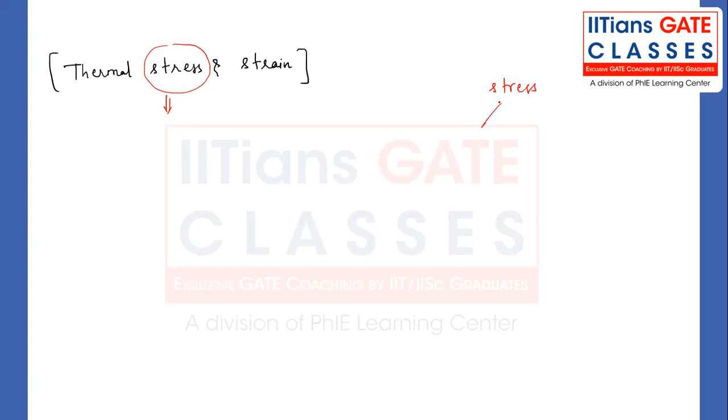So here I will classify the stress under two categories: one is mechanical stress, and then we have the thermal stress.

Now try understanding what I'm talking about. In thermal stress, whenever you say total stress developed on the cross section of the member, you always represent it by both these stresses. Put a very important note here: what I am discussing right now will be discussed theoretically as well as with formulas. So, total stress on a cross section of the member...

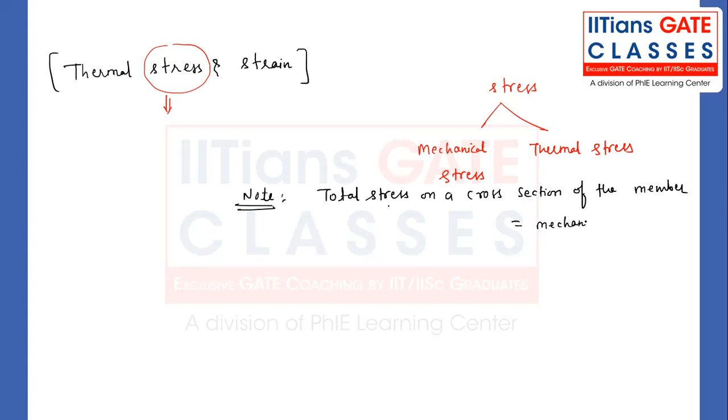will be equal to mechanical normal stress plus thermal stress. So total stress on a cross section of the member will be mechanical normal stress plus thermal stress.

But what about the mechanical normal stress? Mechanical normal stress is developed due to the load acting on the cross section of a component. This mechanical component of stress will be generated due to the load acting on a cross section of a component.

When you apply the load, the body will try to resist that load. During that resistance only the stress will be generated, that is nothing but mechanical stress. Sir, what about the thermal stress? That is what we have to discuss.

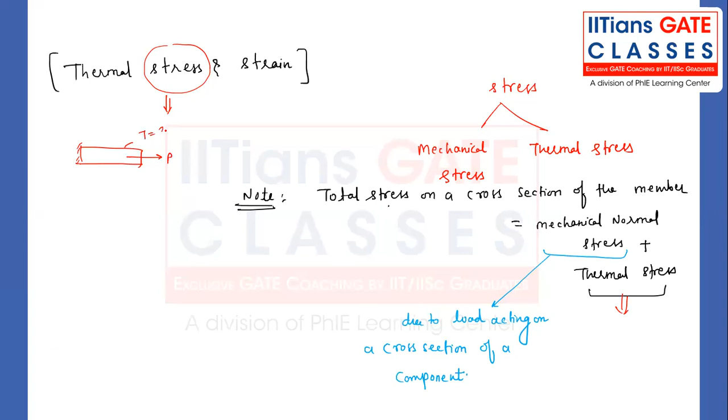See, suppose you have taken any body and you are working, applying the load at a temperature, let's say 25 degrees centigrade, that is the surrounding temperature. Like in a particular laboratory of this firm, you are maintaining the temperature as 25 degrees centigrade. That means there will not be any thermal stress if you are not changing the temperature.

So for generating the thermal stress, for developing thermal stress in a component, in a material, the first criteria should be that there should be some temperature variation. There shall be temperature variations, that is the most fundamental requirement of thermal stress to be generated.

Because not only the temperature variations, delta T, I'm talking about delta T, you will see in the formula also delta T is coming. So there's no doubt that in the theoretical aspect we are saying that, but formula-wise, can we prove that? Yes, we can prove that.

The second requirement will be the above thermal deformation, which should be restricted either partially or completely. Let me write here: this is the second requirement of generating the thermal stress, that is the above thermal deformations.

Because of the temperature variations, there will be some thermal deformations. So the above thermal deformations, because of temperature variations, shall be restricted either partially or completely. Whenever you talk of any member, any material you take, there will be two types of stress: mechanical normal stress and thermal stress.

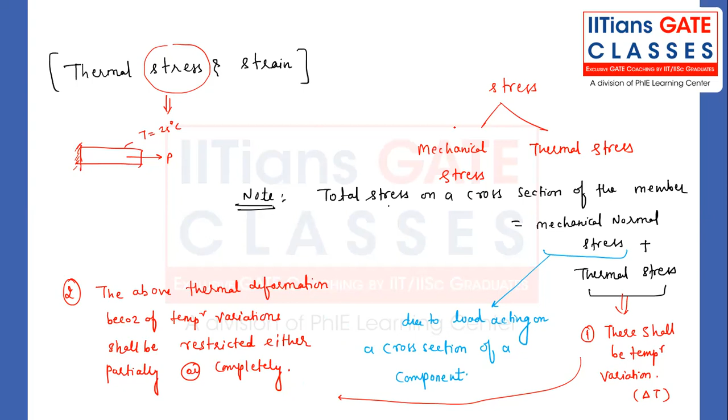Understand, suppose my dear friend, it's a property of the material. What is the property of the material? For example, there is a rod which is placed in environmental conditions, not in the air, but on a bench or something. And now for this rod, I have increased my temperature, delta T I have increased. For example, temperature can decrease also, in a cool environment it can decrease.

So this particular material, my dear friend, when I increase the temperature, what will happen? There will be some kind of deformation for this material. So what is this? There will be thermal deformations.

As we are not applying any load, there will not be any axial deformation as of now, only we are increasing the temperature. That's why because of increment of the temperature, there will be some elongation in the length side as well as in the other dimensions. The final length will be more than the original, and whatever the width will be there, that is also more than the original width or thickness of the material.

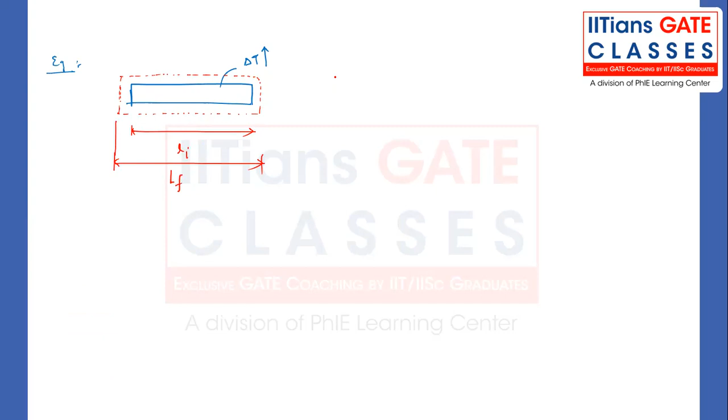So what is this delta, the change in length? The total final length is maybe Li plus delta L. Whatever the change in length is there, this is the final length, for example this is my final length, this is the initial length. So whatever the final length minus initial length is there, I'm calling this delta L.

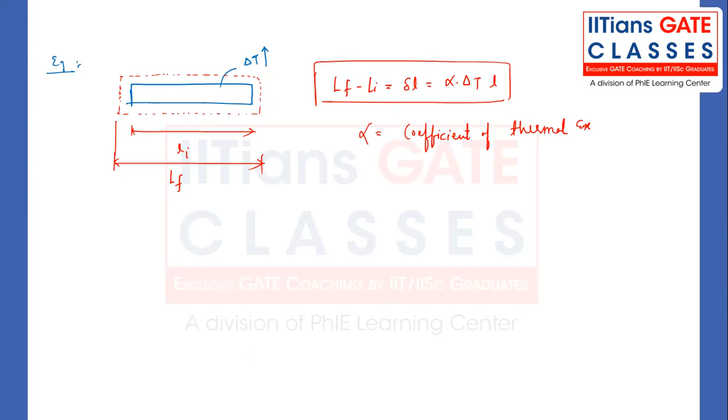What is this formula? The formula will be alpha into delta T into L. What is this alpha? Alpha is nothing but the coefficient of thermal expansion. This is the material property, one of the very, very important properties.

Second thing will be delta T, that is change in temperature. Li will be the original length, Lf will be the final length. So note down, these are the very important things regarding this.

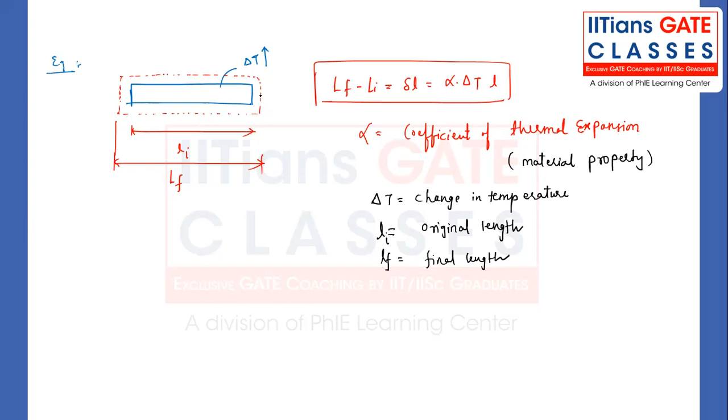Now, my dear friend, this thermal deformation which is happening is good, but will this thermal deformation cause any amount of stress? That's a big question mark. Whatever thermal deformation we observe, whether this will cause any amount of internal resistant force to be developed in the material, let's see. That is the point of discussion.

Unlike what you have seen with axial deformation because of loading conditions, where it's a sure guarantee unless there is a support - if there is a support, there will be some kind of stress, whenever there is a restriction, there will be some stress in the material. Let's see for this case. So this is what we are discussing, case by case, about these thermal stress studies.

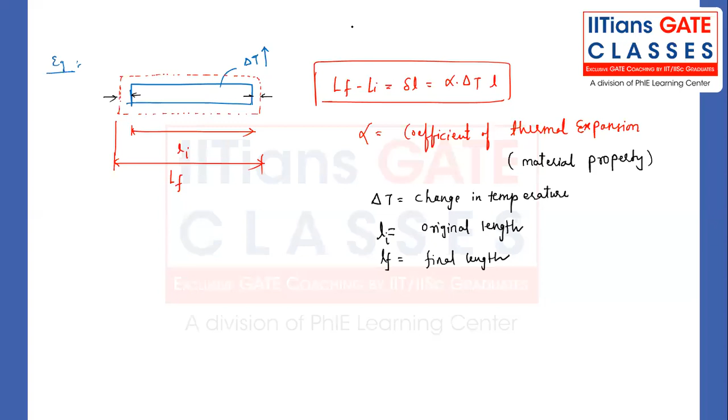Case number one, note down, this is very important. The case number one I am calling is the free expansion case. I will connect the dots. I know right now you might have so much confusion, but no need to worry. Note down the first case, that is the free expansion case, free expansion or free contraction, whatever you can call it.

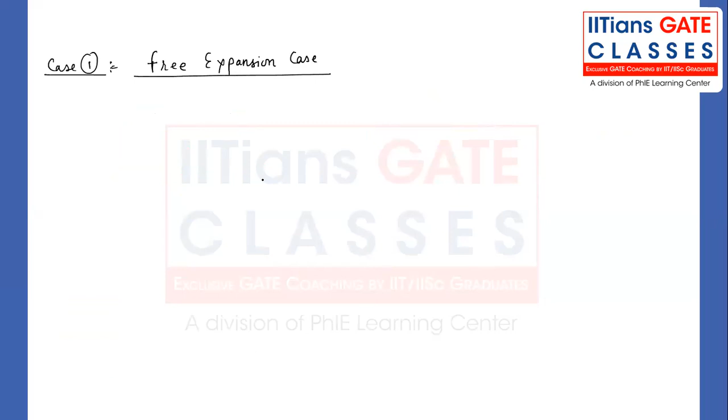Let's see, my dear friend, I'm just taking one slab, one body, which is nothing but a plate. A plate kind of thing where I can show all three dimensions: this is L, this is B, width, and this is nothing but thickness. My dear friend, this was the original at a temperature T.

But suddenly I increased the temperature like anything, delta T. Definitely there will be some elongations: delta L will be alpha into delta T into L. Delta B will be alpha into delta T into B. Delta T (thickness) will be alpha into delta T into T. There will be deformation in all three dimensions, lengthwise, widthwise, and thickness-wise. Now let me show it by the diagram so that you can visualize what I'm talking about.

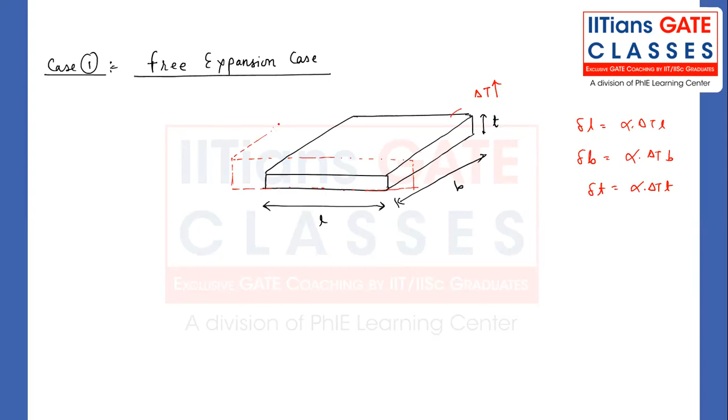Understand: when there is expansion, this material, based on its properties, will show deformation lengthwise, widthwise, and thickness-wise, as you can see clearly.

So this will be my final length, this will be my final width, and this will be my final thickness, my dear friend.

Because of the free expansion, there will be some strain. Whenever there is deformation, strain is change in dimension by original dimension. That is the fundamental concept. The fundamental definition cannot change whether you apply thermal load or mechanical load; the basic fundamentals of stress and strain remain the same. Change in dimension by original dimensions.

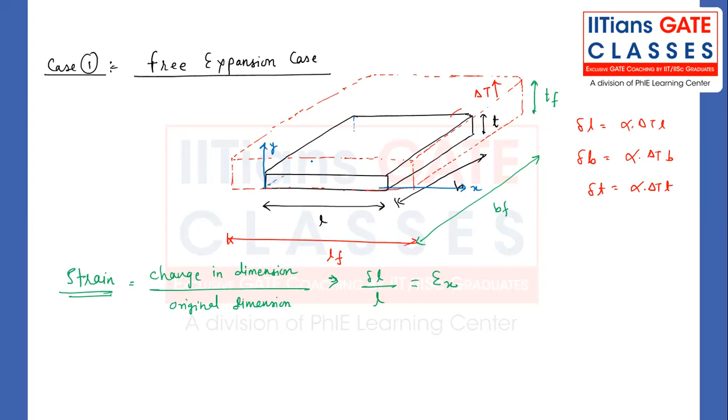What are the changes in dimensions happening? Change in dimension, suppose delta L divided by L. This I'm calling epsilon x. Let me put the coordinates so it's easy to identify: this is x, this is y, and this is z, my dear friend. Let me make it a three-figure kind of thing so you can visualize. This will be z. So along the x direction, whatever the dimension is, I'm denoting by delta L, that is the length. So this I'm calling epsilon x.

Sir, what is the formula? Change in length equals alpha into delta t into L, divided by L. This will cancel out, so we get alpha into delta t.

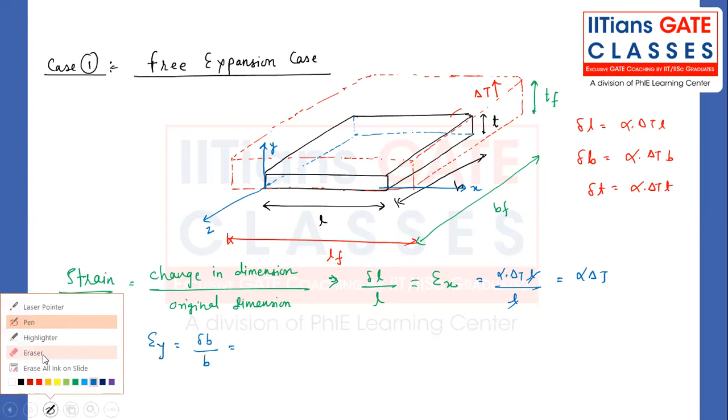What about the strain in the y direction? Change in width divided by original width—sorry, change in thickness divided by original thickness, because in the y direction we have the thickness. So change in thickness divided by original thickness gives alpha into delta t once again. Similarly, you'll get epsilon z also as alpha into delta t. So epsilon x equals epsilon y equals epsilon z, that is equal to alpha into delta t.

This is called thermal strain. No doubt, this is a thermal strain, not a mechanical strain, not a longitudinal strain. It is not a longitudinal strain, it is a thermal strain. Be very, very careful.

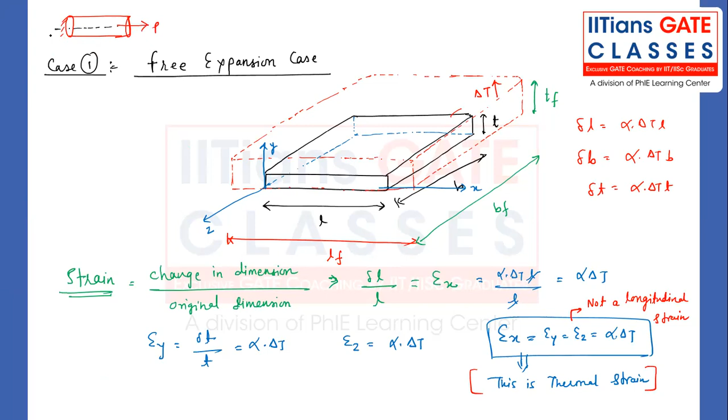What are longitudinal strains? We've already discussed this. Whenever we have a rod and we apply a load like this, then in the direction of the applied load, whatever strain is generated is called longitudinal strain. Perpendicular to the load, whatever changes happen in the dimensions, we call that lateral strain. In a thermal loading condition, there is no such scenario of longitudinal or lateral strain. Here we simply call it thermal strain. Keep this in mind.

Now, what is the nature of this strain? It is tensile strain, because in all directions there is an increment in the dimensions. So this is a tensile strain, not a compressive strain. There will be some tensile strain developed in the material. Make a note of it.

For case number one, alpha is a material property—everybody knows alpha is a material property. When you change the temperature, the material wants to expand. If the material itself wants to expand by its own nature, and we are allowing it to expand, that means there will be no stress.

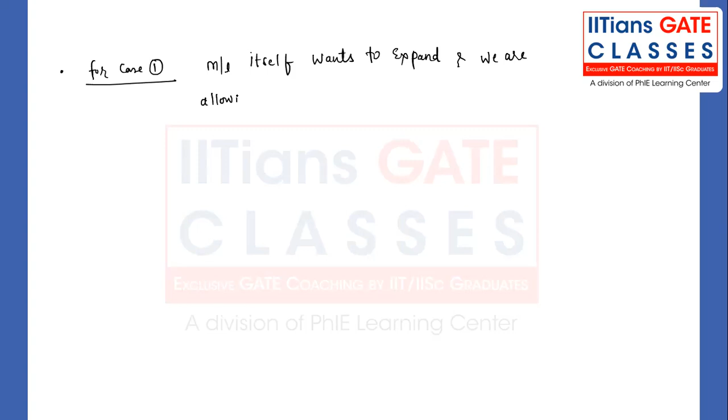I'm talking about the stress and strain we've discussed. For case number one, the material itself wants to expand, because when we increase the temperature, alpha being a property of the material, it will definitely try to expand. Nobody can stop the material from expanding—it's a property. The material itself wants to expand, and we are just allowing it to expand.

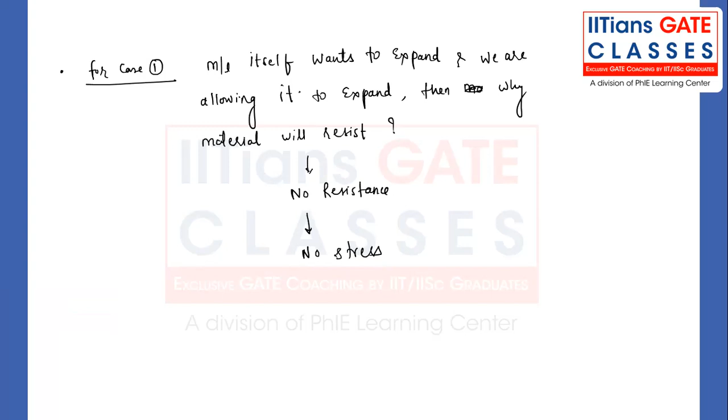Why will material resist? No resistance means there will be no strain or no stress. No resistance means no stress. So free expansion is nothing but a no stress condition, my dear friend. That means sigma thermal stress in X direction, sigma thermal in Y direction, sigma thermal in Z direction will be 0, my dear friend. Sir, what is the meaning of you are allowing it to expand?

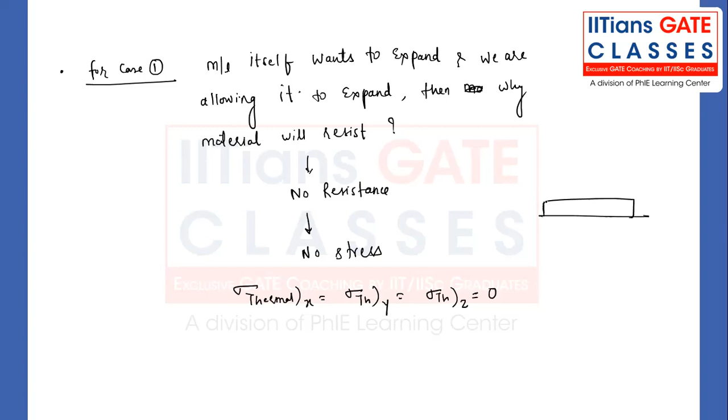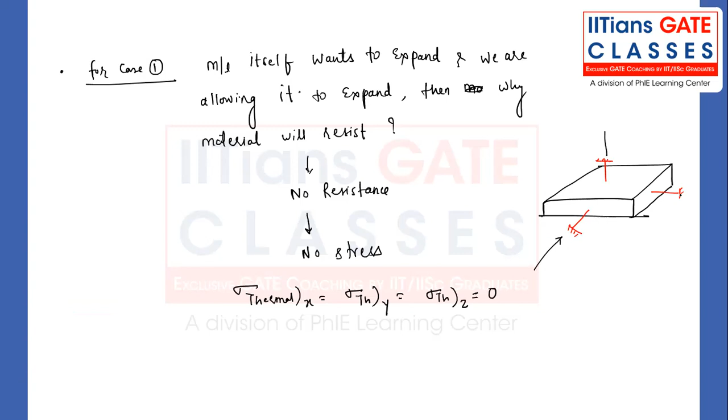See, just now I told you we have just restricted the material. For example, suppose we are not allowing it freely to expand, not allowing it to expand easily. We are just superimposing some kind of support reactions. Now there's a support, and this support will say, now you cannot expand freely, because there will be some kind of reaction forces. Rx, Ry, and Rz will be coming into the picture.

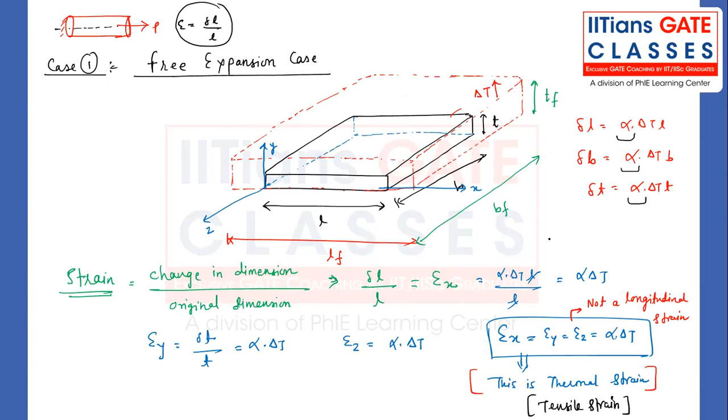Earlier, case number one, there is no such kind of support reaction. Whatever support reaction is there, from nowhere is it coming, because we are going to allow it to completely freely expand. But here you can see there is no such kind of restrictions. Material is freely expanding like anything. But in this particular scenario, the material is placed, the temperature has been increased, but it is not allowed freely to expand because some restriction is there.

Because of what? Why are the restrictions coming? Because of the support reaction forces. So indirectly I can say Rx, Ry, and Rz were 0 in our first case. There was no reaction forces. Material was freely trying to expand. Material wants to expand and we are allowing it to expand.

What is Newton's first law? If the body is in a particular state of rest condition, it will remain under rest conditions. That is the law of inertia. Same thing is happening over here also. Initially, before changing the temperature, the body was saying that I am just at ease, I am just at basically calm positions, don't try to disturb me. That was the condition set by the material.

But the moment you try to superimpose some condition like temperature change, the material will say, okay, you change the temperature and we are not finding any restrictions, no problem. That is also basically the law of inertia. If the material wants to move and you are providing some driving force for the flow, then why will material resist? And I told you, stress is internal resistant forces. No resistance, simply no stress.

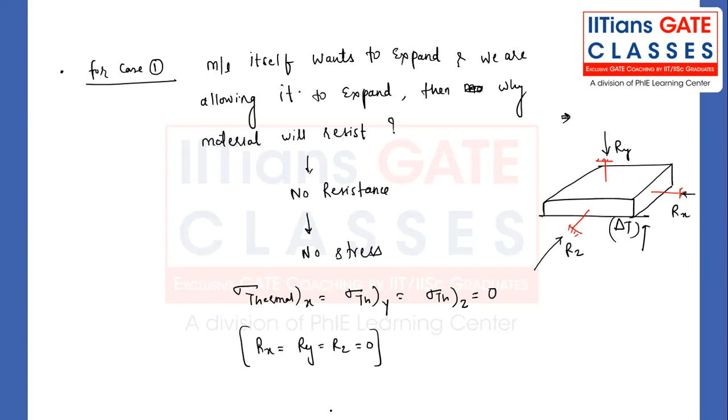So stress is dependent on strain. Strain is not dependent on stress. Getting my point? So this is one of the important points. That's why we plot the x-axis as strain, the independent parameter, and the y-axis as stress, the dependent parameter. Now let's discuss case 2.

That is nothing but a partially restricted case, or maybe we can discuss the completely restricted case. Just now I told you about one case, this one. Maybe you can expect a similar kind of case 2. Case 2: completely restricted case, one of the very easy ones.

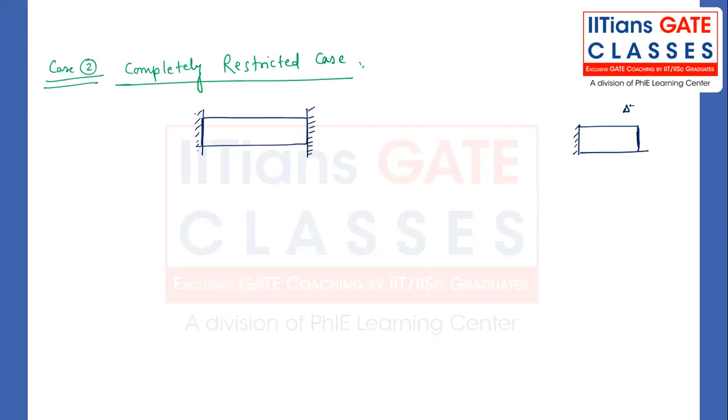Try understanding, earlier my dear friend, we placed the material like this. But now we place it in between the supports. Earlier, you might have placed it against some support only, but without support on the other side. Now we place it between supports, and you just increase the temperature, and the material will happily try to expand like anything.

It was simply expanding like anything, but right now there's a complete restriction. Remember, it is a rigid support, my dear friend.

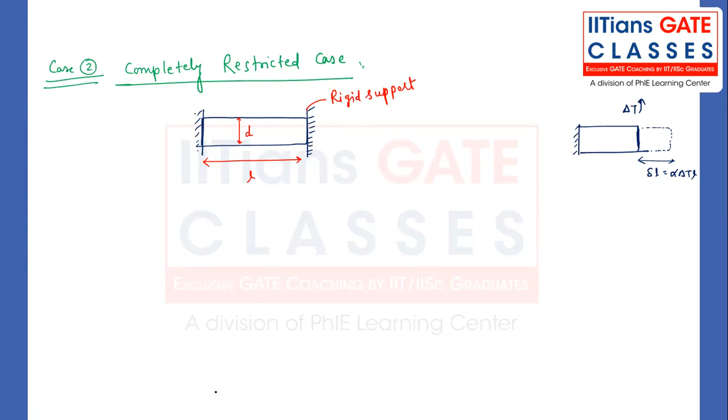Whatever rigid support is there, you assume that it is not there in the first case. So what I'm just using is the superposition principle. Superposition method - what is the superposition method, my dear friend?

You just take the support away, and basically what I'm saying is you just increase the temperature. After increasing the temperature, my dear friend, what will happen? The material will try to expand like this.

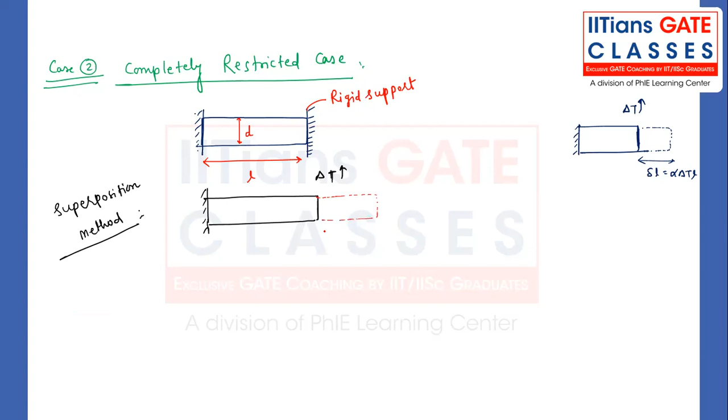The material will try to expand like this. Nobody can stop it. Once you remove the support, nobody can stop that material from expanding, right? But what will happen, my dear friend? What will be happening after expanding to this much of distance?

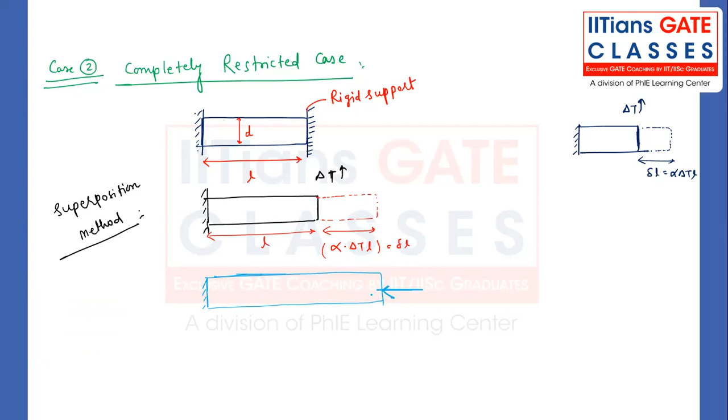Now put the support back to the structure. Then what will the support say? Hello, go back. Go back to what? Original position. Initially, you just remove the supports.

What is the principle of superposition? Analyzing the structure by superimposing different loading conditions. That means in the first case, we will take no rigid support, just a free expansion case. It will freely expand, but after some point of time, we will put the rigid support back into the picture, and it will offer some kind of reaction forces.

Reaction forces. And what you are observing, my dear friend, is because of this there will be some delta 1, and because of this mechanical reaction force there will be some delta 2. At the end of the day, you superimpose these two conditions, and the final condition should be what we discussed - it should come back to the original position.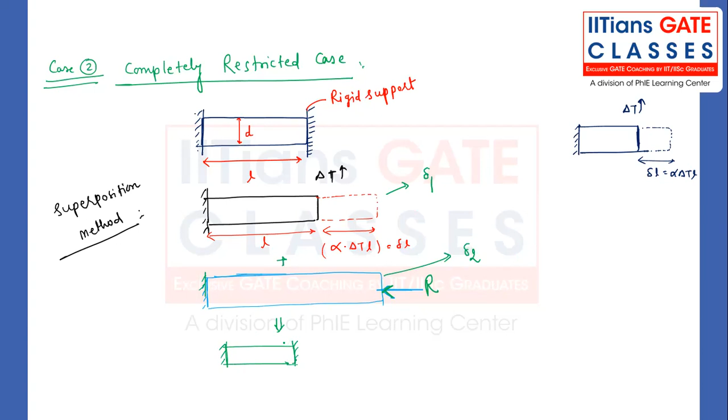That means total change in length has to be 0. First, we will assume there is no rigid support, and we will allow the material to expand freely, happily, and after some point of time we will place the support back, and it will offer some kind of reaction forces, as everybody knows, right?

And my dear friend, what we are observing - try to understand very keenly and patiently - is that delta 1 plus delta 2 has to be 0.

So delta 1, thermal deformation due to temperature variation, is alpha into delta T into L. Alpha into delta T into L - positive or negative? Positive, sir.

Because of the compressive reaction forces - everybody knows what axial deformation is - P into L divided by AE. Suppose any material is there and we are just applying the load P, having a length L and a diameter D, then PL divided by AE, that will be the axial deformation, my dear friend.

Here, what will be the axial deformation? Minus of R into L divided by AE. That is equal to 0. From here, what will you get for reaction forces? Alpha into delta T into E into A.

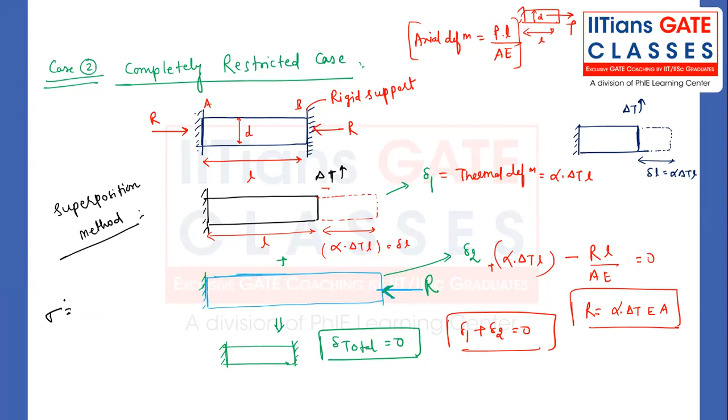Once the internal resistant force is developed in the material, we know that stress is load divided by area - not simply the load, but resistance force divided by area. That means alpha into delta T into E into A, divided by A. Finally, thermal stress is alpha into delta T into E.

Remember one thing - this is not mechanical stress, this is thermal stress. And why do we call this thermal stress? Because you shouldn't misunderstand that we are applying some kind of reaction force directly - no, no, no. We just increase the temperature, and that's why the reaction force comes. It doesn't happen individually or independently. That's why we call this thermal stress, not mechanical stress. Make a note of it.

So this is a completely restricted case, my friend, right? And as you can see, thermal stress is proportional to delta T. Now what is the nature, sir? Nature will be decided just by the direction of reaction forces. As the direction of reaction forces is compressive in nature, that's why thermal stress will be compressive.

Compressive, my friend. Very, very important, right?

Now, in a very similar fashion, we're going to have case number 3 also. That is a partially restricted case, partially restricted expansion.

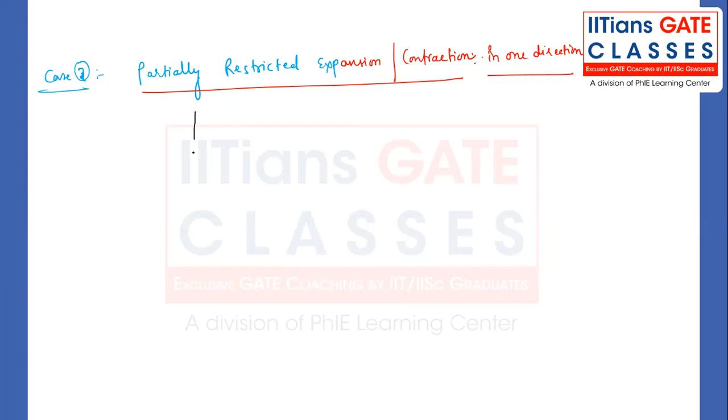Now, suppose my dear friend, we have the material. This is a material we have, which has a length L. Now we just place it in the supports. In between the two supports, we have placed it.

But this right support is not a rigid support, I'm calling this a flexible support. This is not a rigid support, this is a flexible support, my dear friend. That means it can basically displace by a little amount, right? It is not like a rigid support which cannot be deformed. It can deform, right?

Now, again we're going to use the superposition principle, my dear friend. So the very first thing, what will happen?

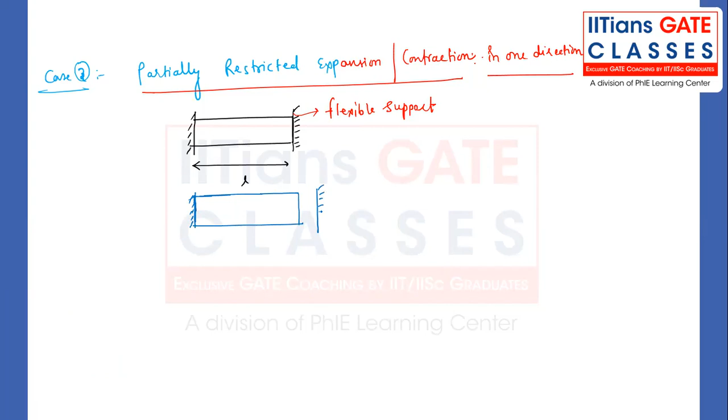Now try understanding. We're going to put the material, and we are just saying that this flexible support has now been displaced by lambda amount. What is lambda? The expansion

permitted by the support. What is the meaning of that, sir? Understand, this is the length L, right? Initially, what will we do? See, both diagrams are related to case number 3 only. Flexible support means the support which can be displaced by the amount lambda as compared to the original conditions.

Now what you do, just start increasing the temperature. When you start increasing the temperature, my dear friend, what will the material do? Material will try to expand.

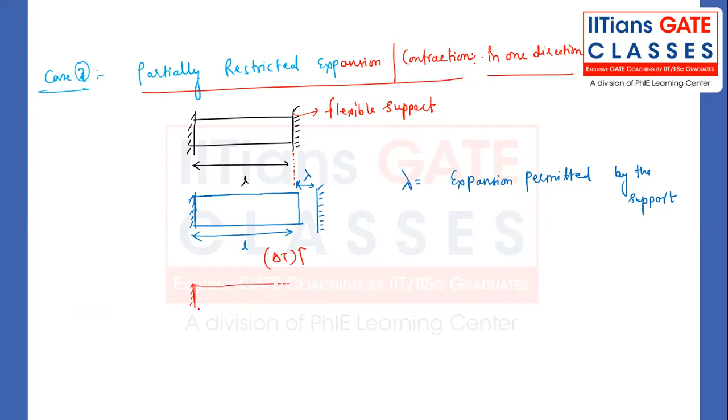Happily, it will expand like this. And how much expansion will be there? That is a material property, we cannot have control over it, right? Once we increase the temperature, it's totally dependent on the material how much it wants to expand, right?

Now, but there is some kind of support. What the support will say, my dear friend: you can have the expansion, but not as much as you are expecting. Complete expansion won't be provided. Whatever you are expecting, that once I increase my temperature and you are expecting alpha into delta T into L, that much expansion will be there - you are wrong. That much expansion will not be there. We will slightly allow you to expand by the amount lambda, not completely, right?

Then what will the support say? Go back. What the support will say is just to go back by this amount. By which amount? This amount, which was alpha into delta T into L. And we are just allowing only lambda. So this much of restriction is there, right?

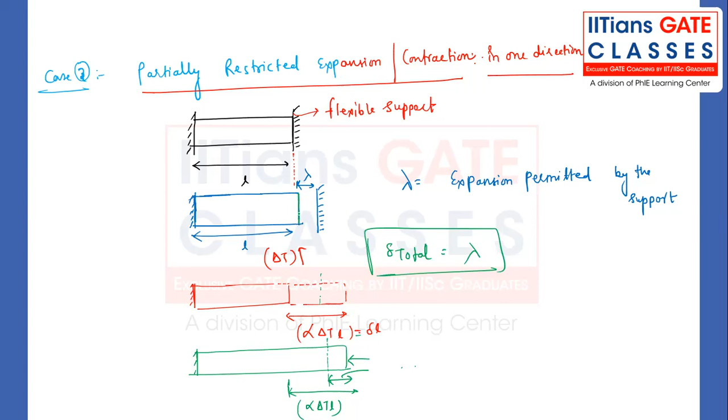The rigid support was not allowing the material to expand completely. But here, whatever the support is, it is just saying that you can expand by the amount lambda. So delta 1 plus delta 2 equals lambda. What is delta 1? Thermal deformation, alpha into delta T into L. And what is delta 2? That is the mechanical deformation, which is R into L divided by AE.

When you solve it, you're going to get R as alpha into delta T into L minus lambda, into E by L into A. Just like the same previous formula, but in the previous case we have not seen any lambda - no expansion was permitted. But here we have provided some expansion. So total deformation is alpha into delta T into L minus some amount of restriction provided by the flexible support. Make a note of it.

This is the restricted deformation. Because of this restriction, which is alpha into delta T into L minus lambda, the resisting force will be developed. And what is the stress? R divided by area. And what is the nature? It will be compressive stress. Make a note of it, very important.

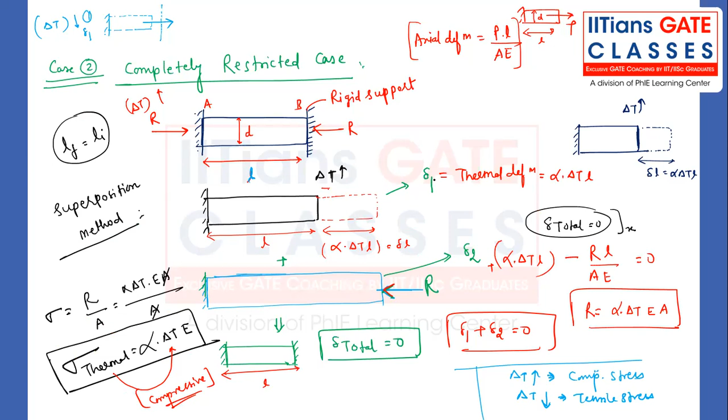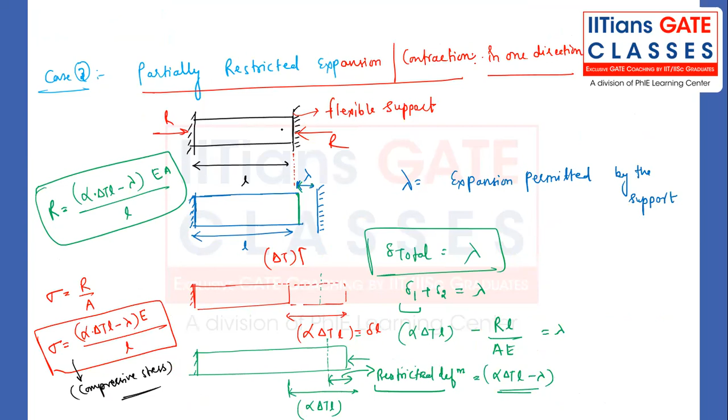In case number 3, we have done the partially restricted case. The rigid support has been replaced by the flexible support, which can displace by the amount lambda. Now in examination, they can play with this in many ways - the case number 3 questions can be asked in many ways. The partially restricted one - that lambda can be replaced by a spring.

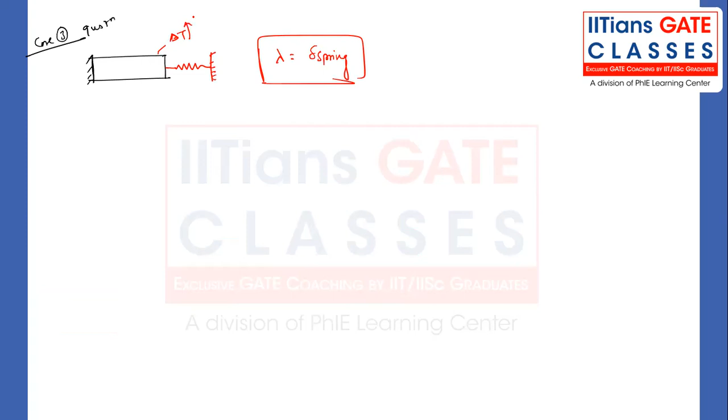If you change the temperature, this body will try to expand, the spring will get compressed, but whatever the total change in length of the bar is, that will be delta of spring. So it is just working like a lambda only. The problem can be asked in this way, or it can be asked in another manner.

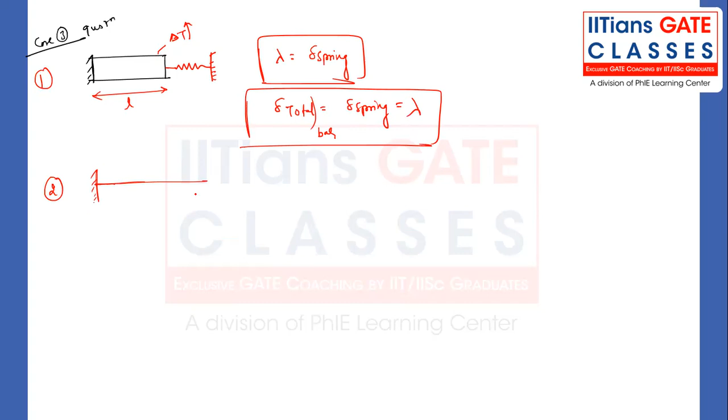Okay, we will see that case through a question. I just want you to have the feeling that case number 3 is a partially restricted case - if I place a spring, that will be a very similar case, just like case number 3.

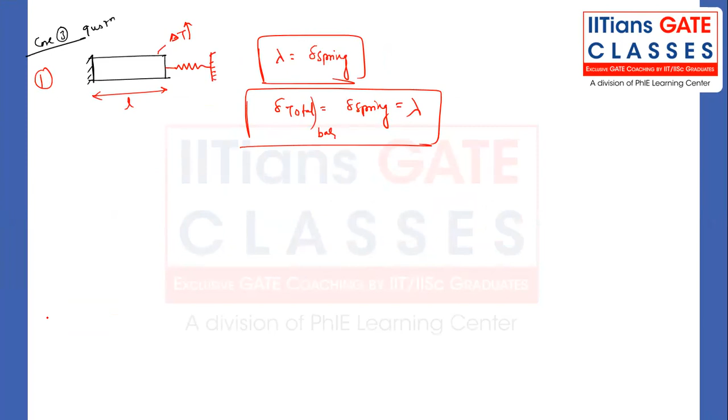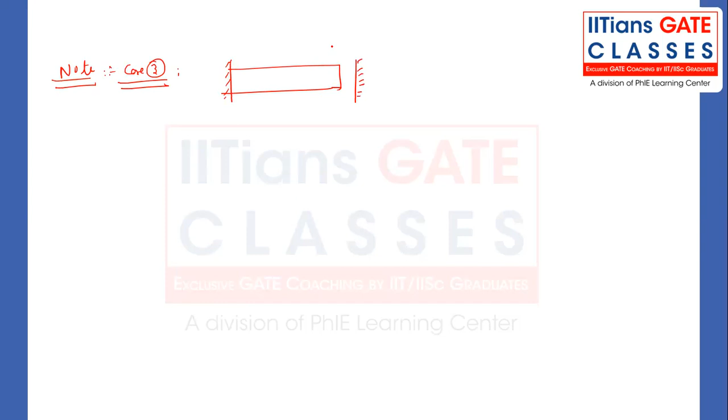Now, a precaution - precaution in case number 2 and case number 3. In case number 3, the body was placed like this, under the impression of lambda - meaning this lambda deformation is permitted. This body has length L, diameter D, and here is the flexible support. But if the deformation due to temperature change, whatever expansion there is, is less than lambda...

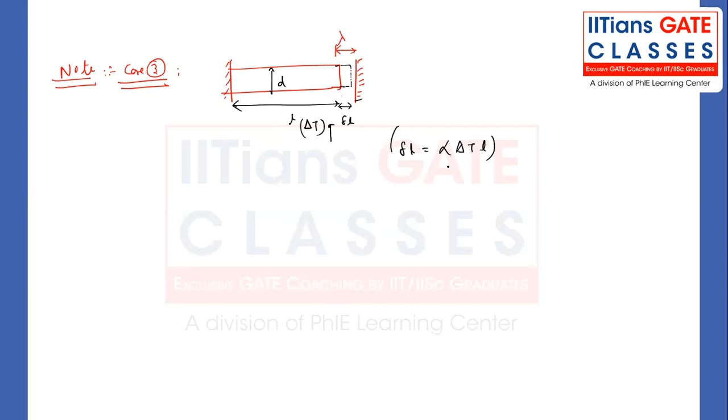This delta L, that is alpha into delta T into L, if it is less than lambda, there will not be any thermal stress. The thermal stress will be zero. The material is freely expanding, it is not touching the support. The material is saying that because of its property, my alpha is very, very low, and even though alpha delta T into L combined gives just 5 mm, and you are permitting lambda, suppose 10 mm, for example, we are freely expanding.

When we are freely expanding, nobody is stopping us. If the support would have been here, then we say you cannot expand. But right now the support is far away from the free expansion case. So this deformation of 5 mm is just a free expansion kind of thing. For case number 3, to have thermal stress not equal to zero, alpha into delta T into L must be more than lambda. Then only it will be hitting the right support. When it is hitting the right support, then only Newton's third law will be applicable, then only reaction forces by the support will be coming into the picture. Getting my point?

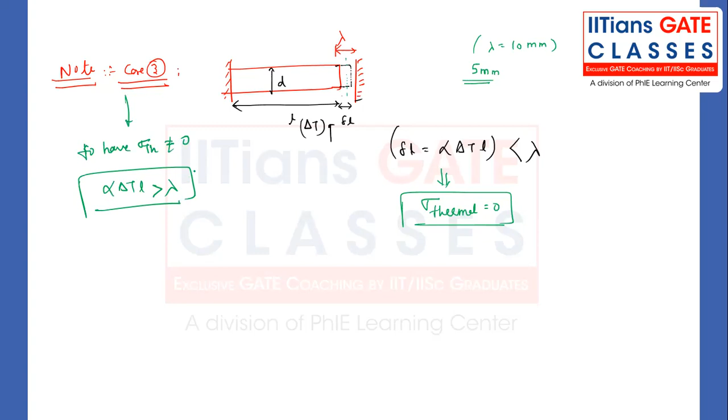Now, thermal stress is mechanical plus thermal, right? What about the strain? Strain due to thermal loading, I told you, will be same in all directions. Mechanical strain, everybody knows that for triaxial loading case, epsilon x is equal to sigma x divided by E. Here they have written mu, you can write nu also, same thing, nu or mu, right?

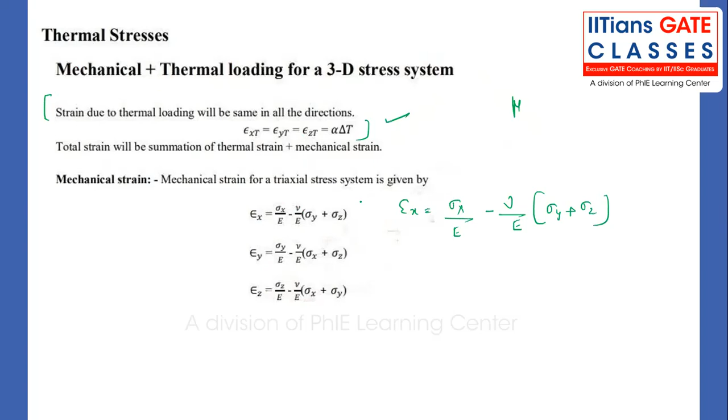If I club together thermal strain and mechanical strain, I will be getting this, my friend: epsilon x, epsilon y, epsilon z. This is the total. If a component is subjected to both mechanical and thermal loading, then both will be coming into the picture. Sir, what is this case, can you please elaborate a little bit? Yes.

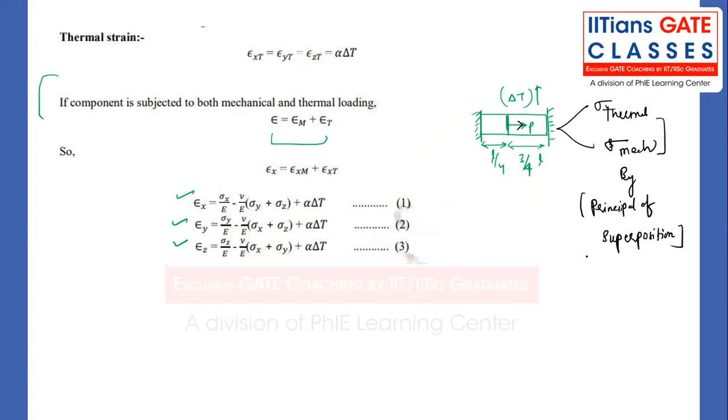Suppose you have a setup where you are applying the load P at L by 4 and 3L by 4, and you are also increasing the temperature. In that scenario, you will be having both mechanical stress, thermal strain, and mechanical strain. Not only that, you will be having thermal stress as well as mechanical stress. Sir, how to solve that? This is beyond the scope of, well, it is in the syllabus, but in GATE examination it's very tough to deal with for the given amount of time, that is 3 minutes. So you can just solve it by principle of superposition. By that particular concept, you can solve it. Let's solve some example.

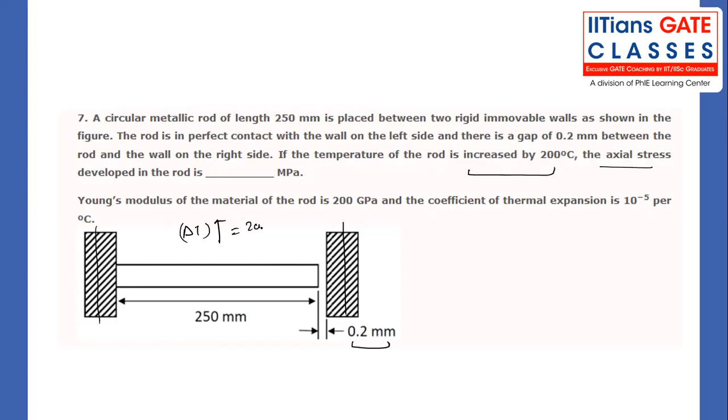A circular metallic rod of length L, that is 250 mm, is placed between two immovable walls. The immovable means that support is like a rigid support. The rod can only deform up to 0.2 mm. Now we have to find the axial stress developed because the temperature has been changed. The rod temperature has been increased by 200 degrees centigrade. So first, calculate alpha into delta T into L.

What is alpha? 10 power minus 5. Delta T is 200. E is 200 into 1000 megapascal, since 1 gigapascal is 1000 megapascal. So when you do the calculation, you get 10 power minus 5 into 200 into 200 into 1000 for alpha into delta T into L, which comes out as 400 mm, more than 0.2.

So what about the thermal stress? Everybody knows thermal stress is alpha into delta T into L minus lambda, into E by L. Just wait, just wait... oh sorry, just a moment, we have placed wrong values here. Alpha delta T is 200, length is 250, right? So I placed the values of Young's modulus incorrectly. So I'm getting 0.5 mm.

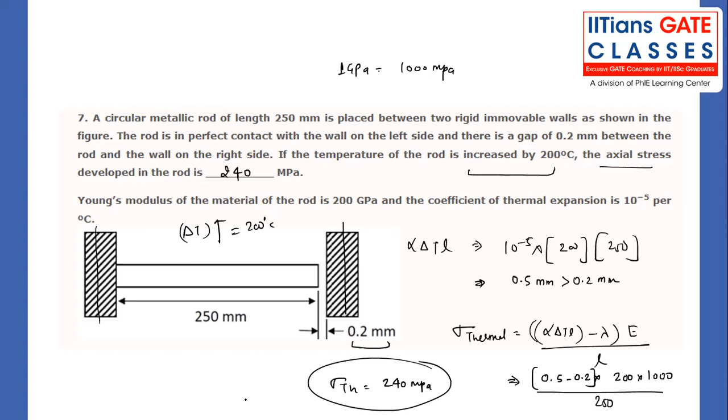Now try to see this particular question. A rectangular plate of uniform thickness having the initial length A and width B is placed between two immovable walls. The temperature of the plate is increased by delta T.

The plate is free to expand along the Y and Z directions. That means there is a restriction only in the X direction. There is a restriction only in the X direction.

In this direction we have the restriction. In the Y direction it can expand freely, there are no support reactions. In the Z direction, that is perpendicular to the plane of the board, there are no support reactions.

What they are asking is, what is the change in the length of the plate after increase in the temperature? That means they are asking what is delta A. That's a very simple question, try understanding one by one.

If material is free to expand in the Y and Z directions, that means sigma Y will be 0, sigma Z will be 0. No problem, because it's a free expansion case in the Y and Z directions. In the X direction, it is not going to be 0, because there is some rigid support that has been placed.

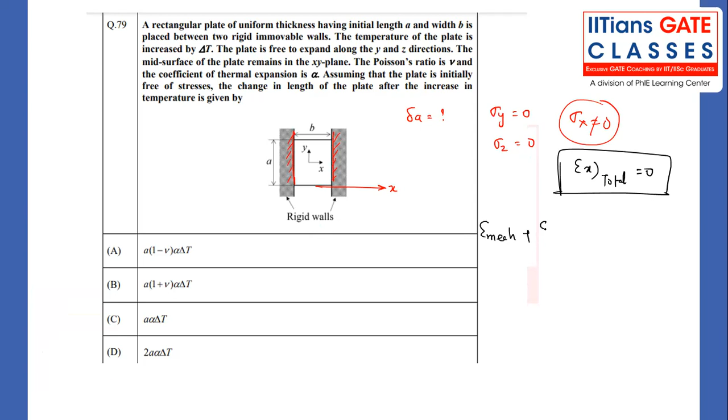We also know that it is a completely restricted case. So total epsilon x will be 0. So total epsilon x, mechanical plus thermal both together, equal to 0.

What is the mechanical strain in the x direction? Epsilon x equals sigma x by E minus mu into sigma y plus sigma z by E. All together this is 0. So epsilon x is sigma x divided by E.

What is the thermal deformation? Thermal strain will be alpha into delta T. That is equal to 0. So sigma x equals minus alpha into delta T into E. By nature of the sign, you understand that is the compressive nature.

That is what we don't need to find, but we have to find the value of delta A, the final change in length. That means we have to find the total strain in the Y direction, because A is the dimension in the Y direction, see very carefully.

So in the Y direction we have mechanical and thermal, both are there. So we can write epsilon y in mechanical as sigma y divided by E minus mu into sigma x divided by E minus mu into sigma z upon E. This is 0, this is 0.

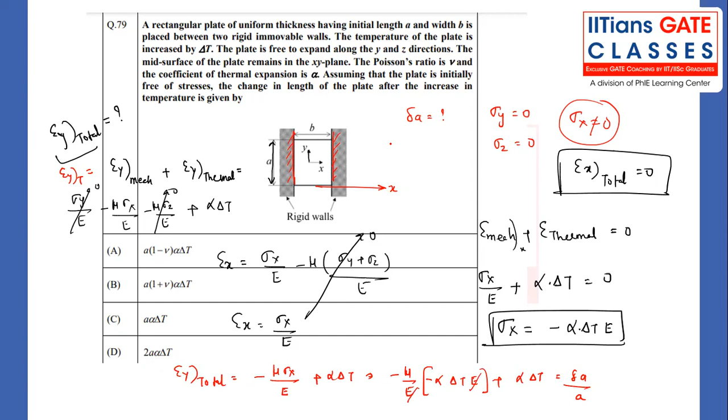So I'm going to get the value as alpha into delta T into 1 plus mu. This will be delta A divided by A. So what is delta A? A into alpha into delta T into 1 plus mu.

Option B is correct. So that's a very simple procedure. Even though you don't know anything, you need to be a little precautious in putting the values of sigma x in this particular formula, you have to keep it with the sign. If you only say it's a completely restricted case, then sigma x will be alpha into delta T into E, that is correct only magnitude-wise, but you're not telling the direction, whether it is compressive or tensile. We know that in this direction there will be compressive stress developed because temperature has increased. So that is all about the thermal stress.